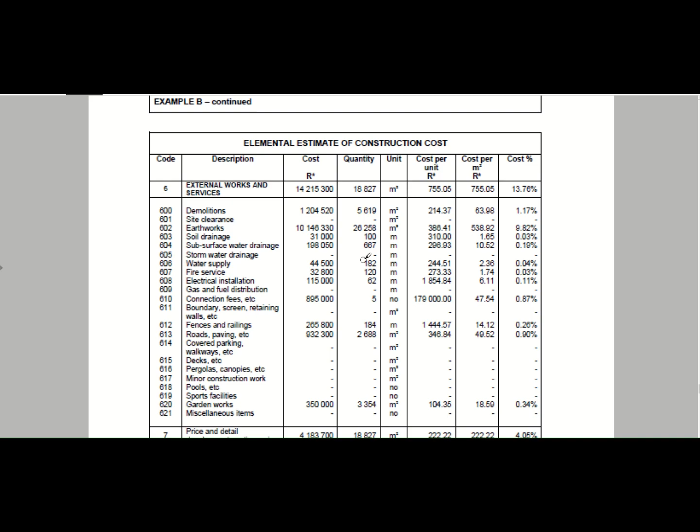Okay, welcome back. So this is where we left off. I just went through the different sheets and displays of it, and now in this video we're going to look at the actual measurements and how to bring it forward into your elemental estimation.

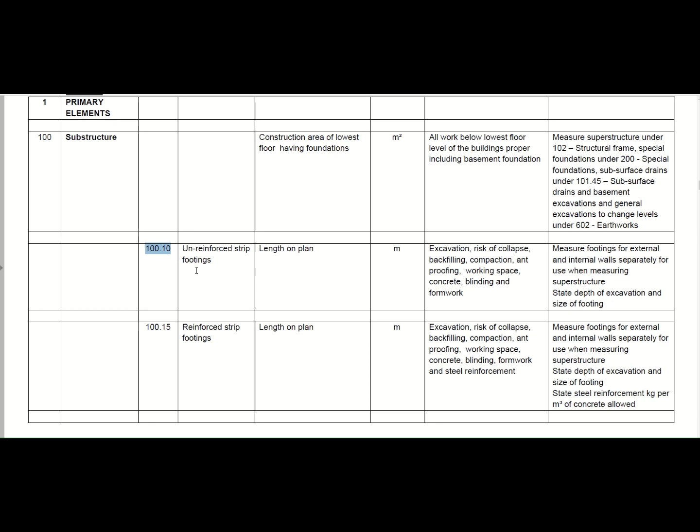So you need to go to your component level or your elemental guideline. Our first item that we can tick, which we have in our example, is unreinforced strip footings. If you've got reinforced strip footings, you will use the second option.

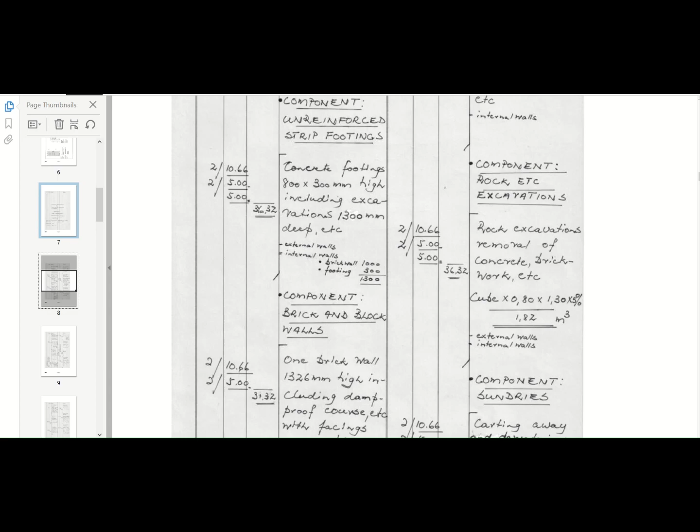Let me just get back to our measurements. I actually opened one here, so let me put this on the screen. So here you've done your measurement, you've got 36.32, and you will see that it's been transferred as 36 meters into your estimation.

Okay, so the next thing is that you need to do your rate build-up, and which is the best document. Here we go.

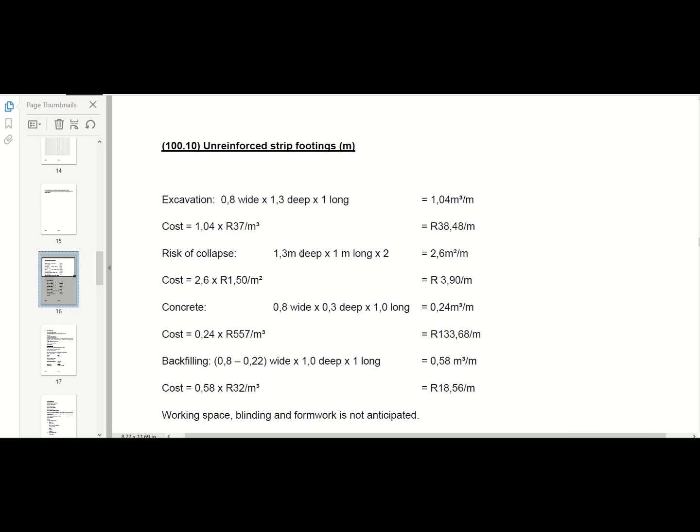So your unreinforced strip footing is an 800 millimeter wide by 1.3 meters deep by 1 meter long section. You want to get it to a meter section, so you've got 1.04 cubes per meter that you need to allow for.

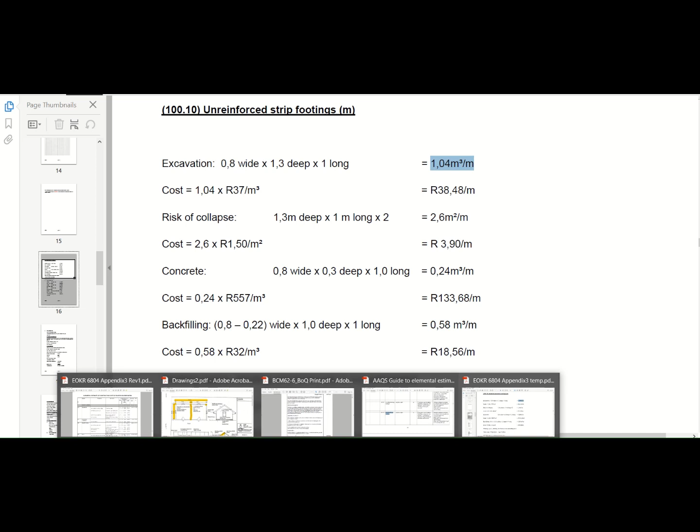So your normal cost for your excavations, which you will get from your bills of quantities. So let's go to our bills of quantities and let's do this. We've looked for foundations. I've used the example that I handed out in the class the other day.

So here we've got a rate of 65 Rand per cubic meter for excavations in our trenches. This is for our strip footing. If we go to our guideline, you will see it includes our excavations, risk of collapse, backfilling, compaction, ant proofing, working space, concrete, blinding, etc.

Okay, so you need to convert it back to a rate per meter. So what we did in the calculation is we got a cost of 38 Rand and 48 cents per meter for this item, for our excavations. This 37 obviously isn't the same as what we've got in the bill because I'm using a different bill.

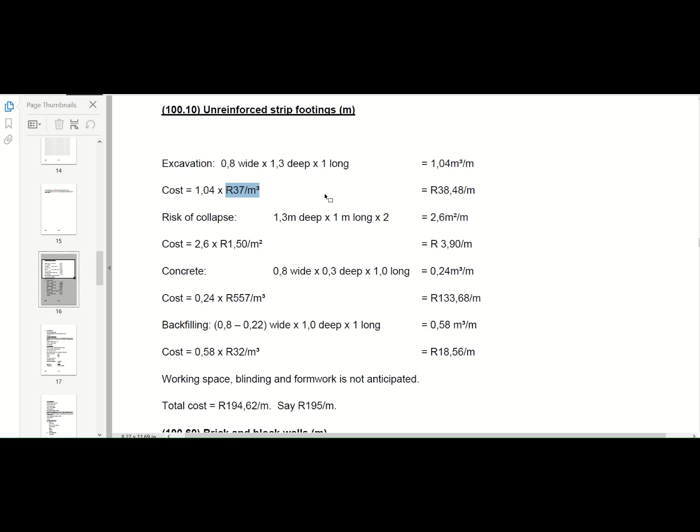So these are old bill rates that have been used in this instance. So, risk of collapse...

is an item in our bill, and I don't expect you to have all of these items correct, but what I'm going to look at in your task is whether you actually try to look for these rates, and I just want to see whether it's in the ballpark or not.

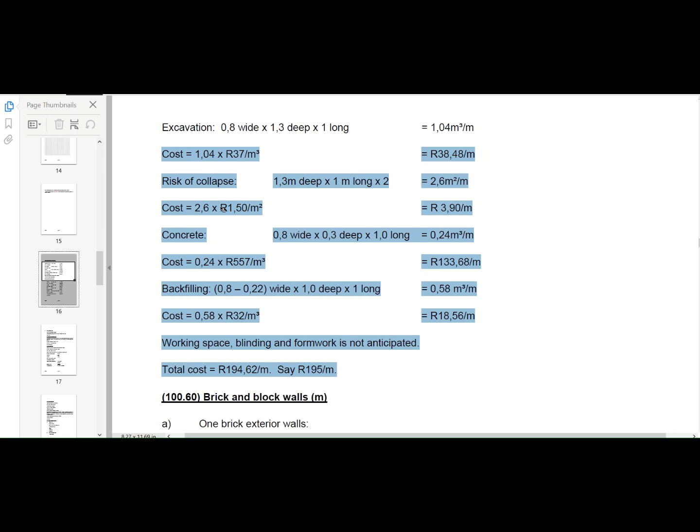This is usually measured in square meters, and in this instance we had 12 Rand, so it has escalated quite a bit since the example. Let's see how it looks when you calculate that.

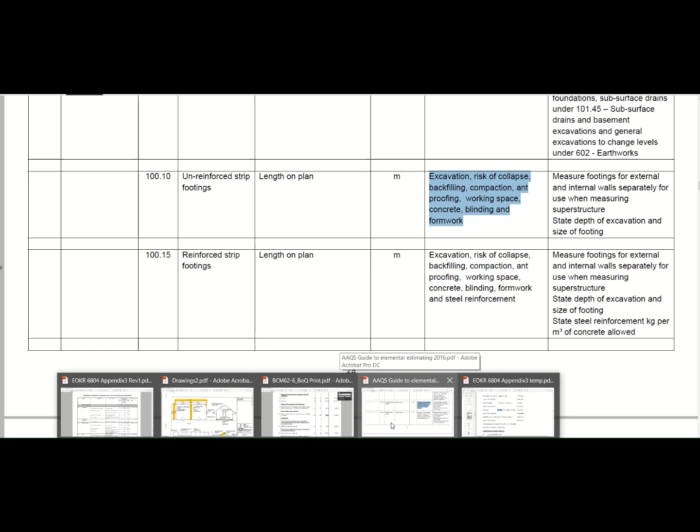Okay, so let's go back to our estimate, sorry, to our calculation. Then that's a concrete 800 millimeters by 0.3 times 1 meter long. So it's 0.24 cubes per meter in this instance, times your rate. Concrete is these days 2,400, so you will see there's a big difference in the rate.

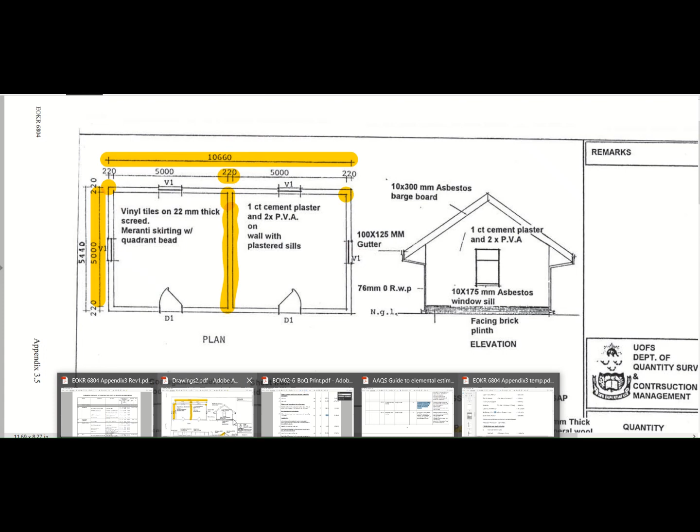Then we've got backfilling. You measure it per cube again. I'm not going to do too much on this, but it's basically you've got your strip footing minus your wall that you've got there, so it's on the side of your wall. If I just go to the drawing again, it's basically this section that you have to backfill, that 1 meter deep, 800 millimeters wide, but you don't include your brick wall in that. Okay, so then you take that information.

Okay, so that's your width that you've basically calculated here. So it's 0.58 meters wide times 1 meter deep times 1 meter long, so you have 0.58 cubes per meter. You times it with your rate in your BOQ, and you get your new per meter rate.

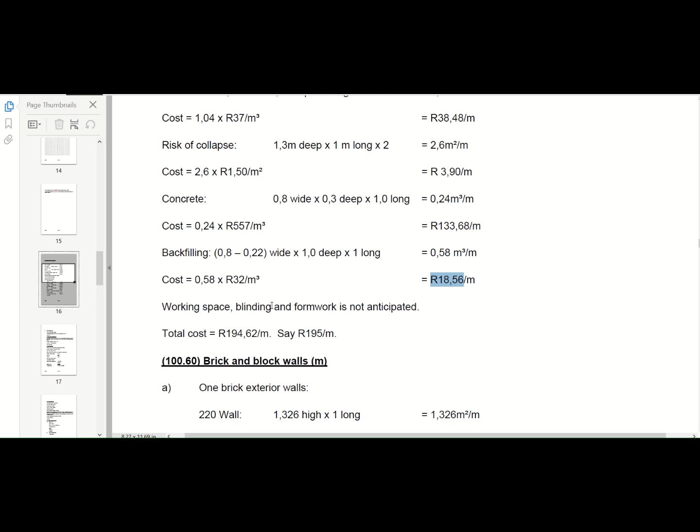So then what you will do is you will add all of your rates together to get a new rate, and you will see that it's actually been rounded up to 195 Rand per meter, and that is the rate that you use in your elemental estimate. Okay, and then you times your quantities with your rate to get your estimated rate here.

Okay, so then you go to your next item, your brick and block walls within your foundations. Remember, we're still in substructure, and then we've got a one brick wall, 1.32 meters high exterior, and then you've got a one brick wall 1.32 meters high also measured here. So remember what we've measured.

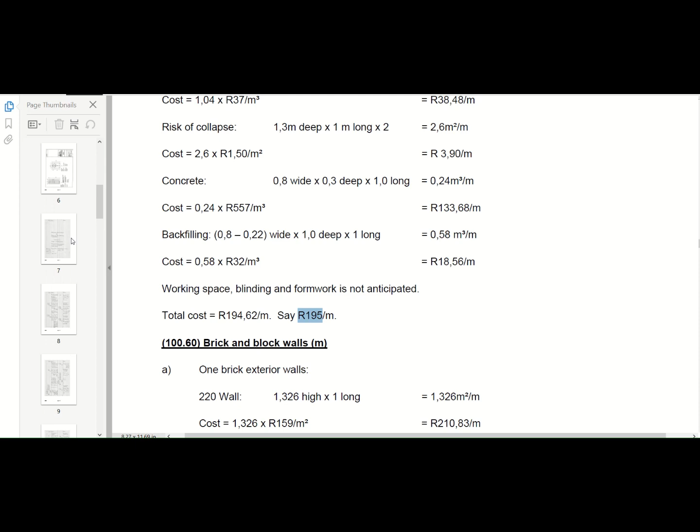Just to go back to our measurements. Our one brick wall here, and our second wall, which is our internal wall. So we've got our exterior wall and our internal wall. So you can see that it's been measured separately, our internal and our external, internal and external walls.

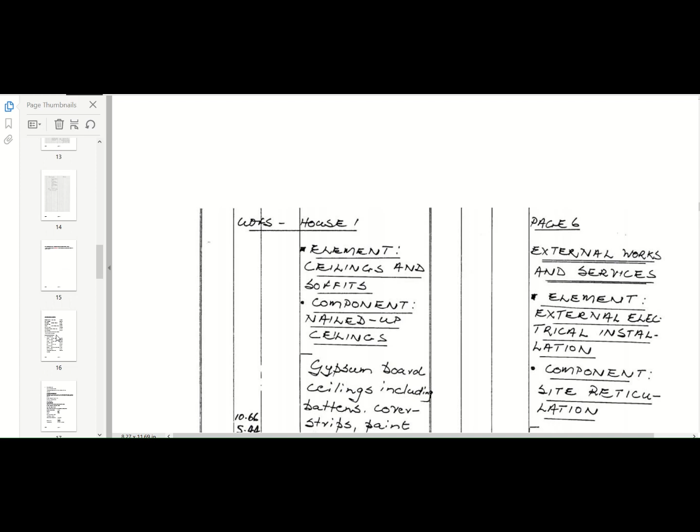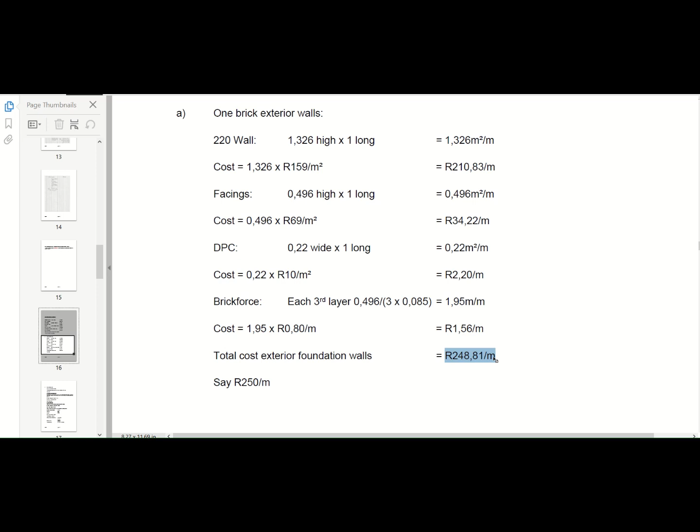Then you go to the example again, do your rate build up. The one brick wall, you can see that we've got our 220mm walls, we've got our facings, DPC damp-proof courses, brick force, and then we calculate our estimated rate per meter, and we use that in our measurements. So 250 Rand here, and then you can see how it calculates that item.

Okay, so that is basically how you go through your elemental estimate. So you do it section by section, and you do your tick box, and from this you will see it's not very difficult, but it is time consuming to actually go through this. And what you will see is that you will start understanding how the bill of quantities actually works if you take it from your bills of quantities to your elemental estimate.

Okay, so I'm not going to go through too much of the examples. What I'll do is I'll just do another video on, for instance, our plumbing installation. I see I have done one here, and you will see that I've done a unit installation. So let's just go to item 112.10 in our example or guideline.

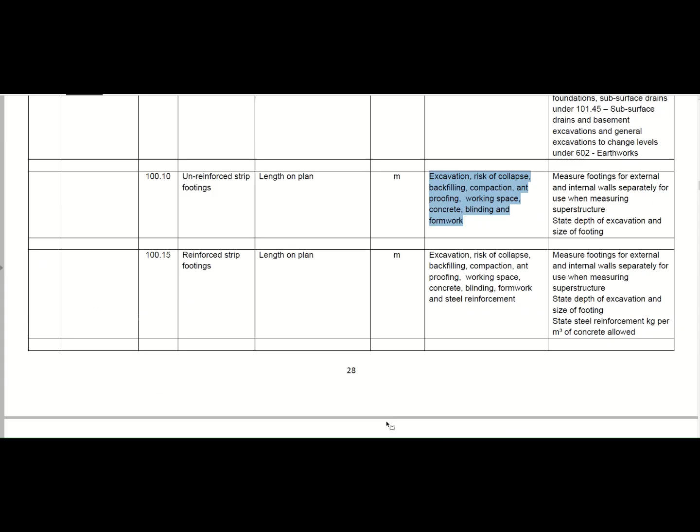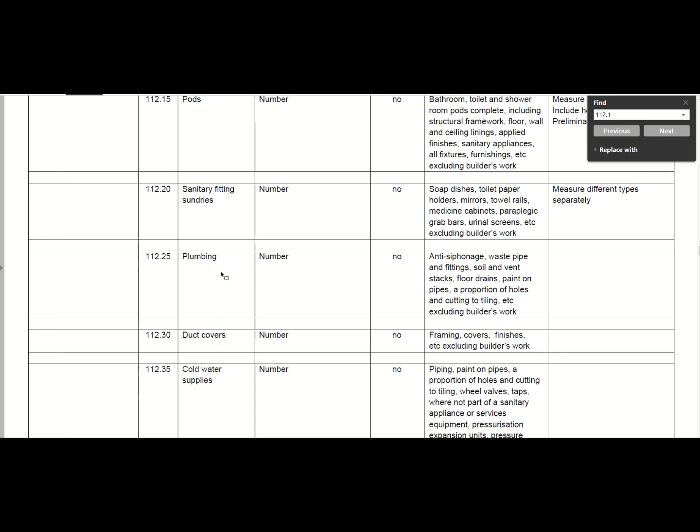Okay, so our sanitary fittings. So you will see here's a whole lot of different items that you can go through. So the main thing is to make sure that you tick all the boxes; like steam and condensate distribution is not really necessary. Okay, so your sanitary fittings: number of fittings, sanitary fittings and units complete with taps, services, pipes, stopcocks, traps, etc., cupboards and worktops, excluding the builder work.

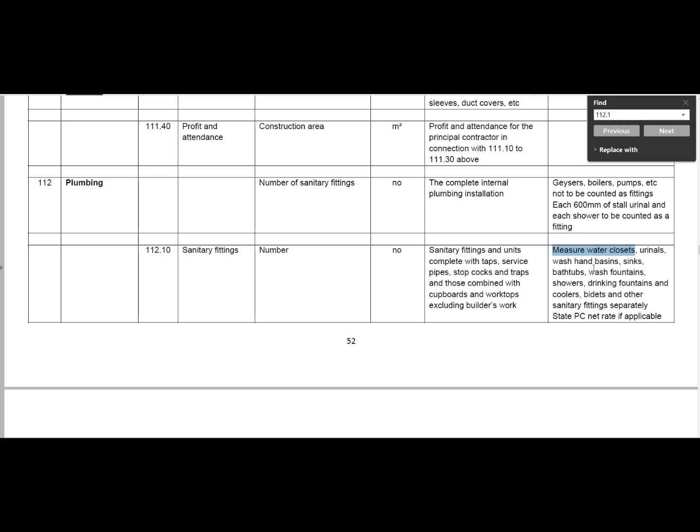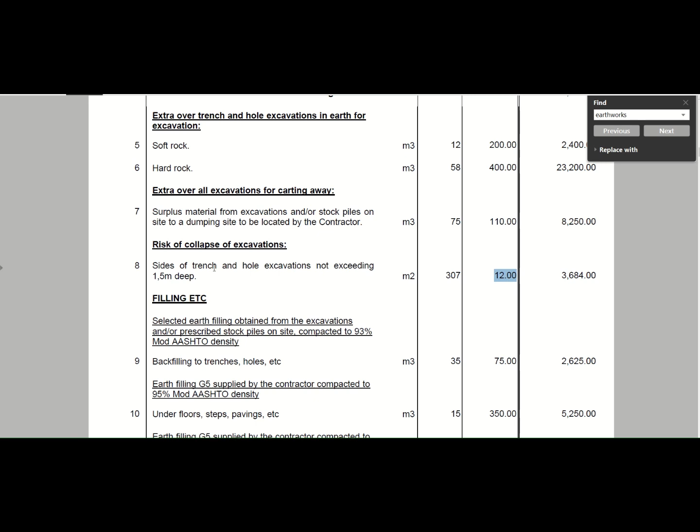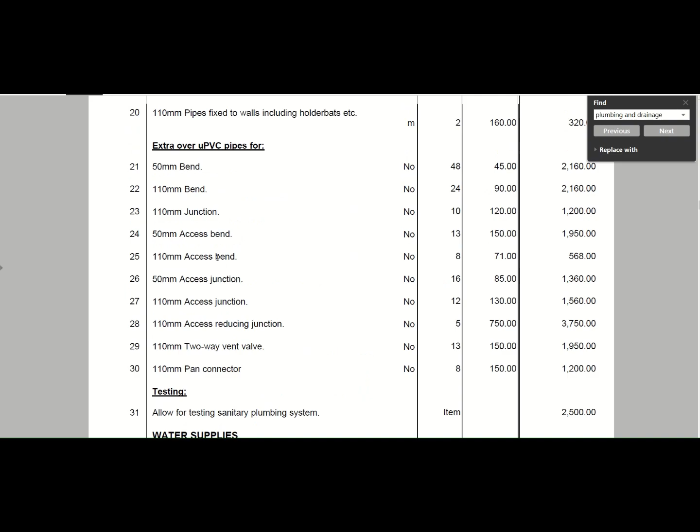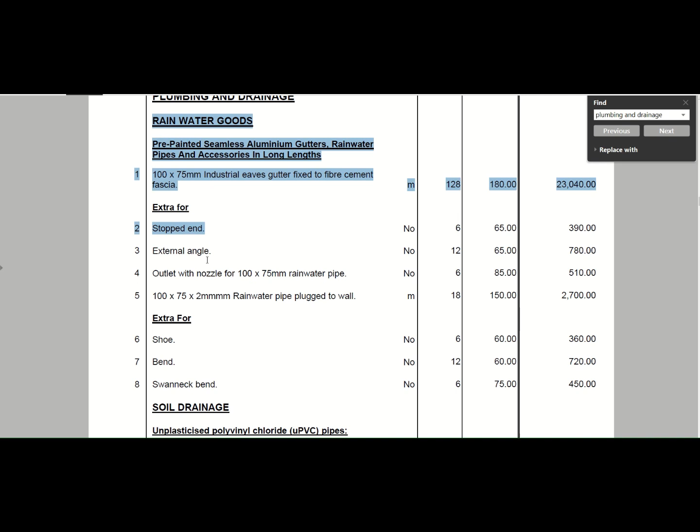Okay, so here we are. Okay, this is the training center. Yeah, that's correct, in section 2. Okay, so if you go through this in your bills of quantities, you will see a whole lot of items included here, but what you want to get to is basically just the rate per unit of your plumbing installation. So you would usually subtract your rainwater goods. This is just your rainwater pipes that you won't include.

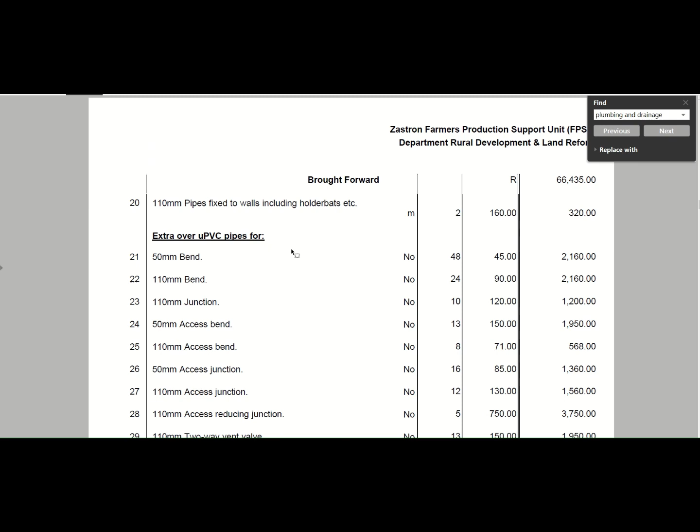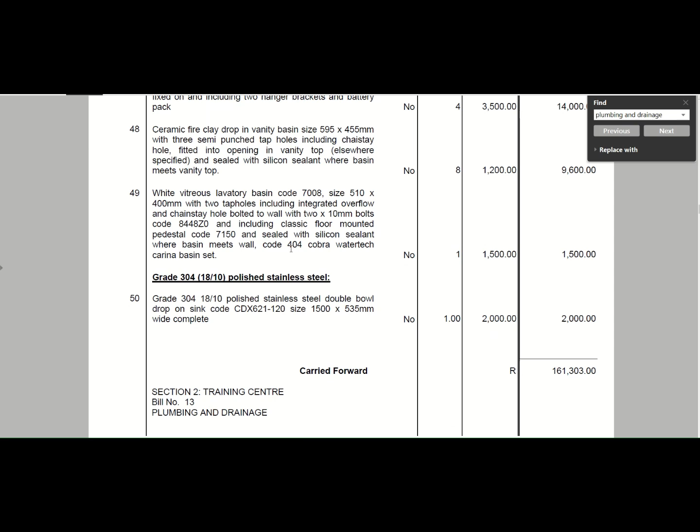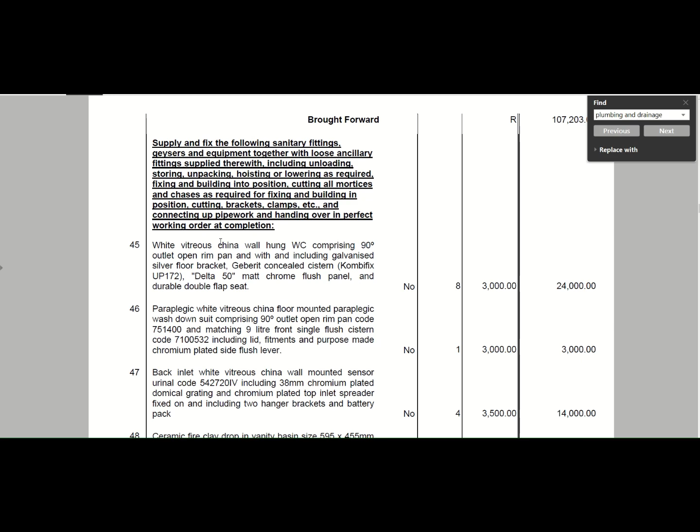Soil drainage, you will include this. Your external works you will exclude basically in your estimation, so manholes and so on. So you will start with your sanitary plumbing, and you will take out all of the items that's included here. So that's the one thing. Then what you need to do is you need to identify all of your items. Okay, so in this instance we've got our sanitary fittings, we've got our china wall hung WCs, paraplegic WC, back inlet white sensors, etc.

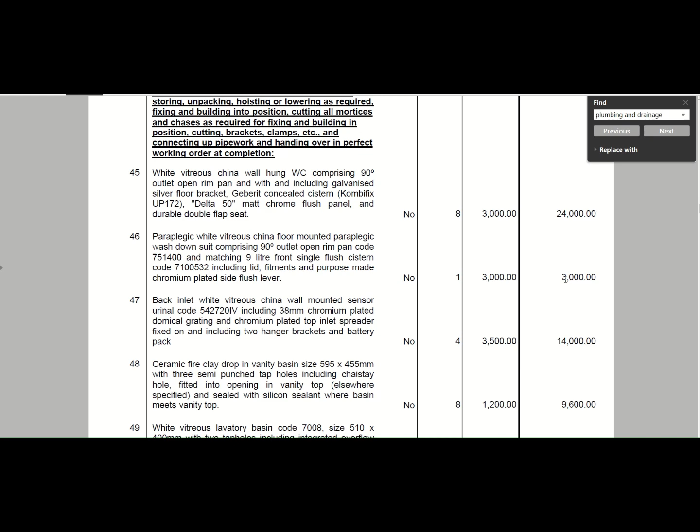Okay, so what you do is you take all of those components and you do your estimation, and then you do your rate build up in a similar way as all the others. So in this case, what I've put together, I have sinks with its taps, the service pipes, the stopcocks, etc., and the soil drainage, and I have put that together to get to a rate of how much that will cost. And the best thing would be to do it for all of your different components for your plumbing and sanitation, and to get to this rate.

So then what I also did was a historical overview, just to get to a comparison of how much the installations actually cost. Let me just make this rands. Okay, and then I took a historical building or project, and I escalated that to when I did this estimation, and I divided it by the number of fittings that I had to get to a rate of my sanitary plumbing installation of the services to that item. So the main thing is to make sure that you get to a rate that includes all the necessary items in your plumbing and drainage.

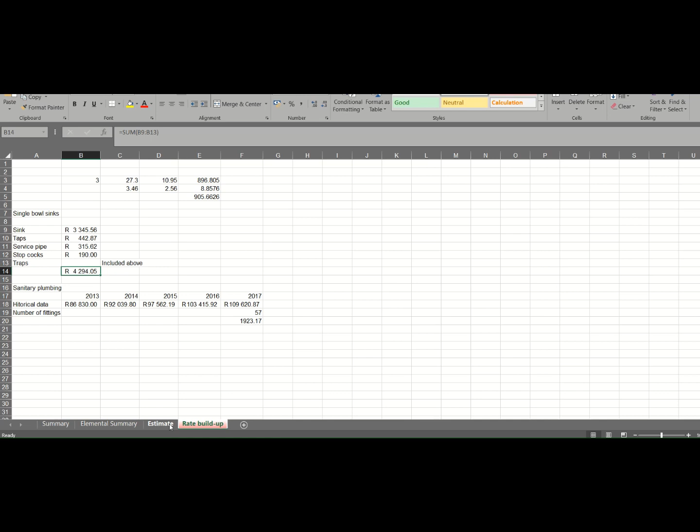So you will see I took this 4,294 to my estimate. Okay, and then one can just round this off for the new installation, and then the sanitary plumbing, PVC pipes, etc. This is our soil drainage, and we had 18 items that used that, like for instance PVC, our WCs and so on. And this is just our sanitary fittings. So I've got my sinks that are calculated here, your WCs you'll add here, that's your water closets, urinals, or whatever fittings you've got. So you will do a similar calculation for that.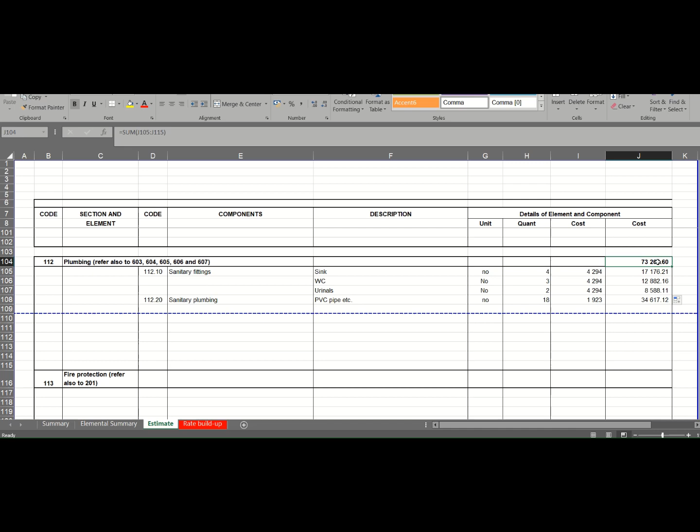I think what should happen now, you should start doing your task, and as you get questions, you're more than welcome to send them through to me, and then we can take it from there. What I'll also do is next week I'll post a couple of videos on the elemental estimation, and then from there on we're going to start doing our payment certificates and work from there. So yeah, thanks. That is more or less the 3 videos that I wanted to share this week, so that you can get started with your elemental estimate.